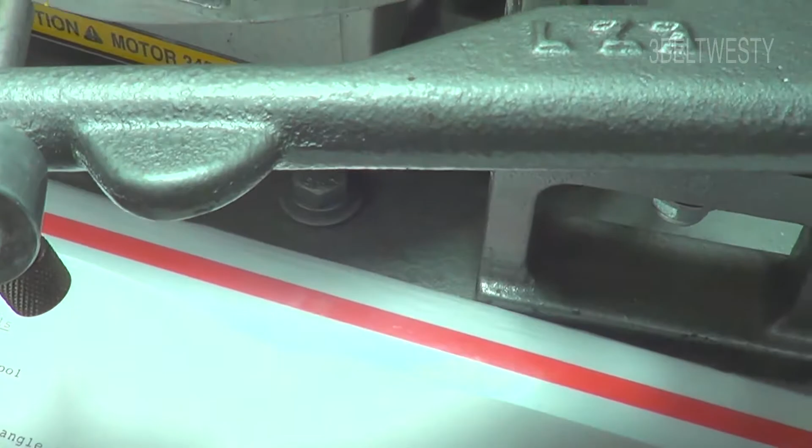On an Easy Sharp machine, the radius of hollow is set by moving the diamond with respect to the tool holder. When this edge is flush to here, it's 5/16.

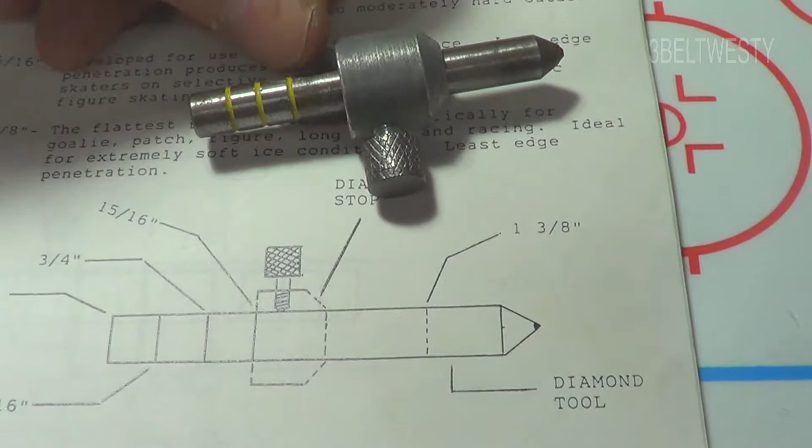When it's to this first mark, it's 9/16. The next one is 3/4. This is 15/16. If you get the nose cone all the way up here, it's 1 3/8.

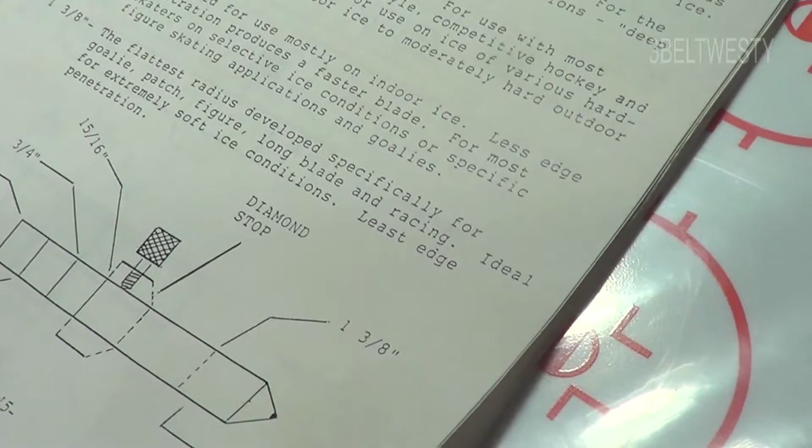And this has got 1/16ths marked off. I went through and did another diagram, a little bit easier to understand, at least for me.

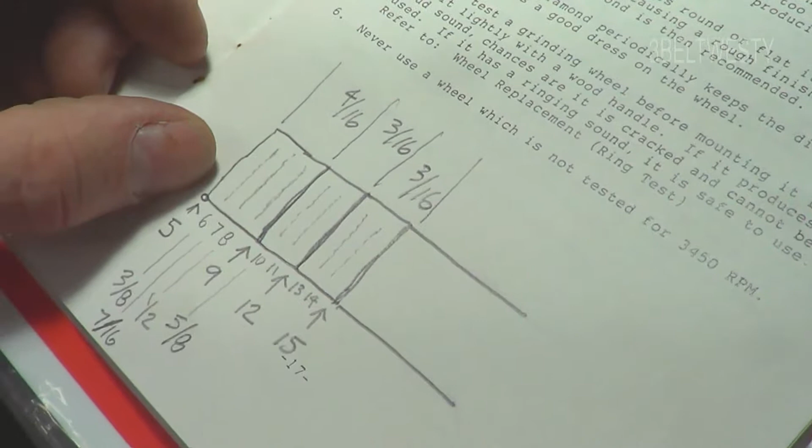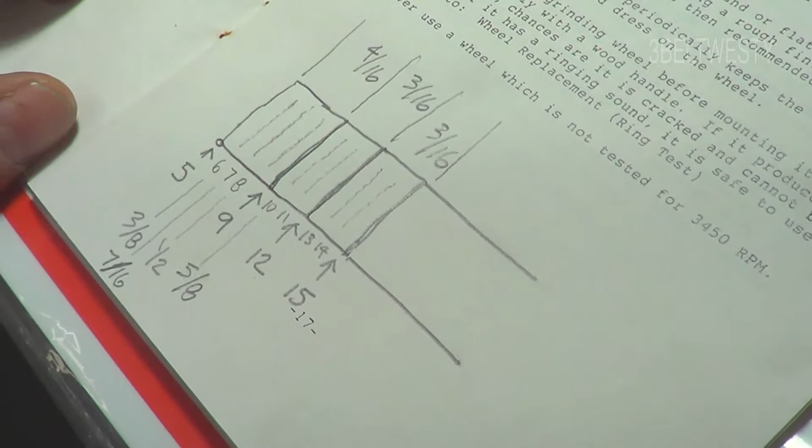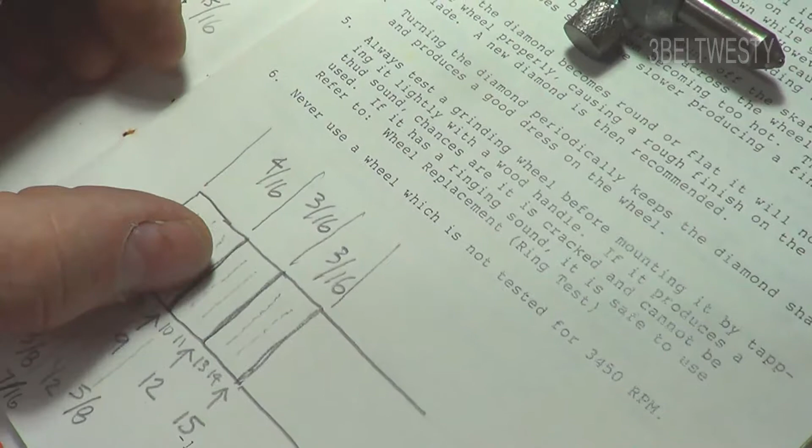It's 5/16 at the edge. There's 9/16, 12/16, and 15/16. So the two bands are 3/16 apart here, and then it's 1/4 inch, or 4/16, up on here.

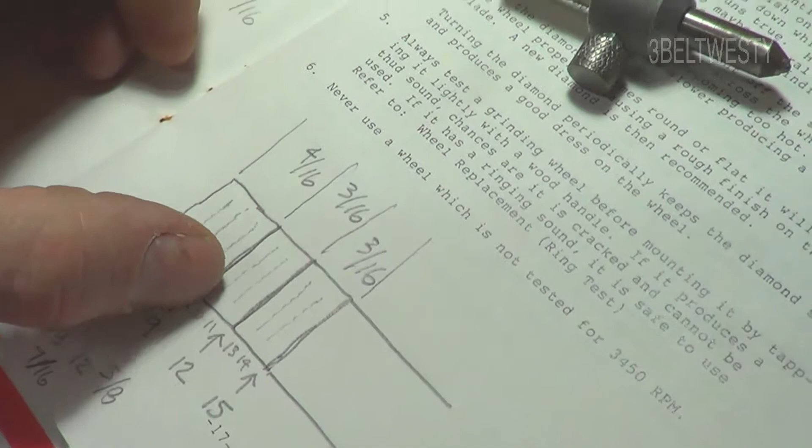I was just using this to kind of figure out, okay, if this is 9/16, there's 5/8. To visualize, you've got two other bands between there.

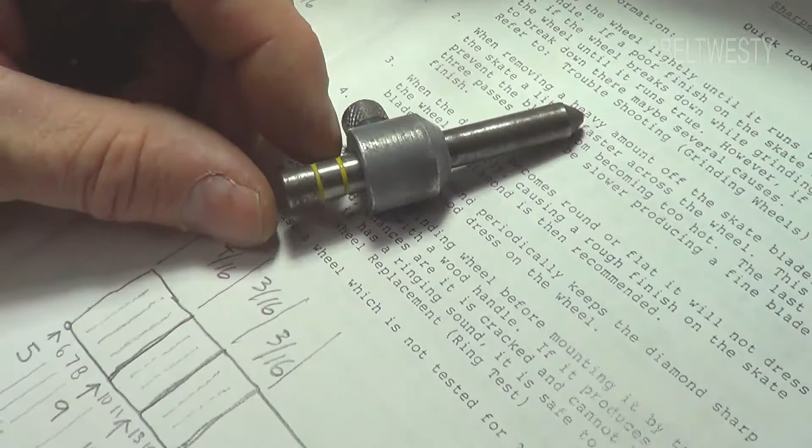So you undo this. If that's flush, like that, that's 5/16. And most of the time, there's a 9/16 right there. If you want to go in to 3/4, if you want to go just like that, that's a 5/8.

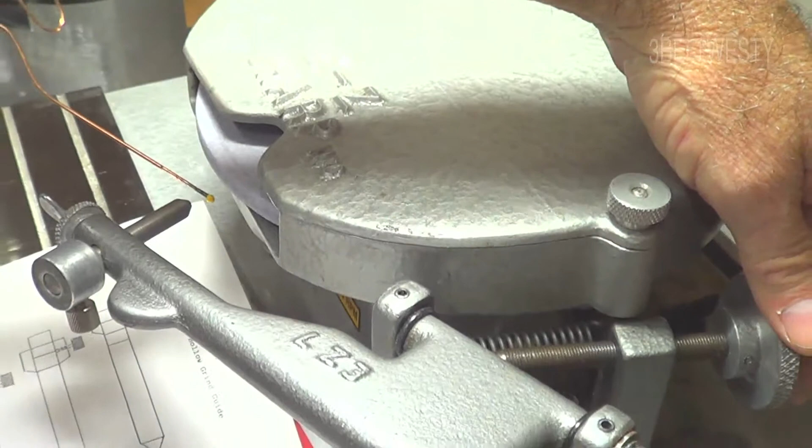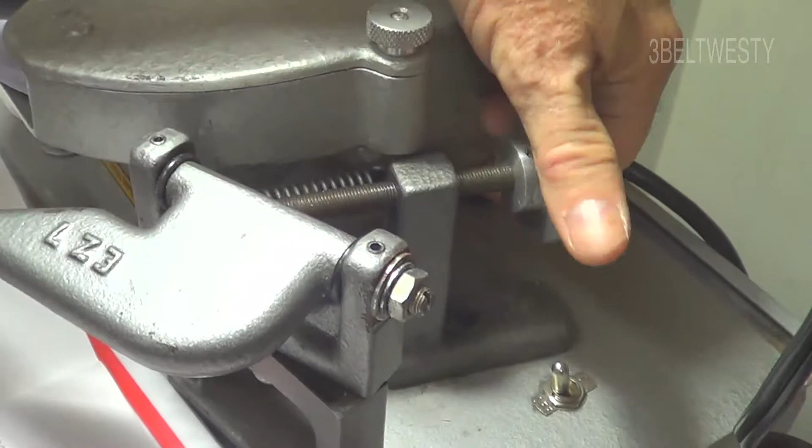Now over here, when you adjust where it is on the machine, this knob brings the tool that's used to cut the radius of hollow. And when you're done, you turn this knob to bring it out of the way. I've got this screwed way out of the way just to illustrate what's going on.

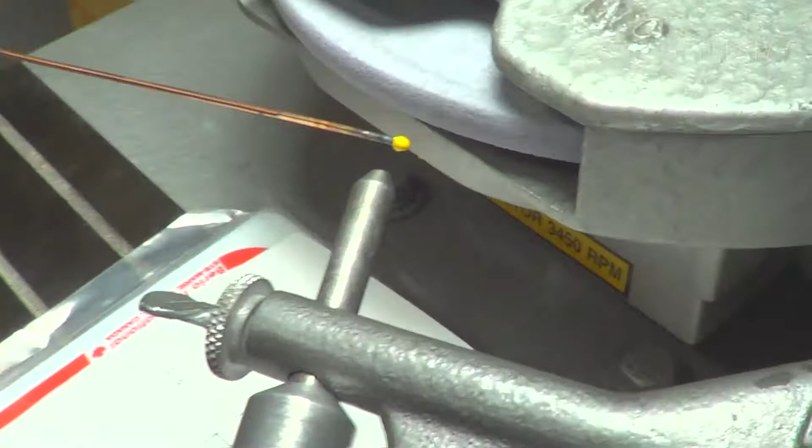I've got this set to 5/16, and then I've got this little dot, a little wire here suspended in space, to show you what's going on.

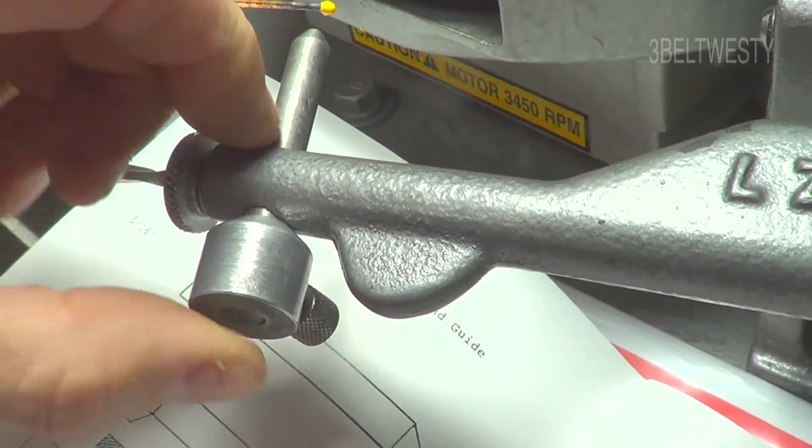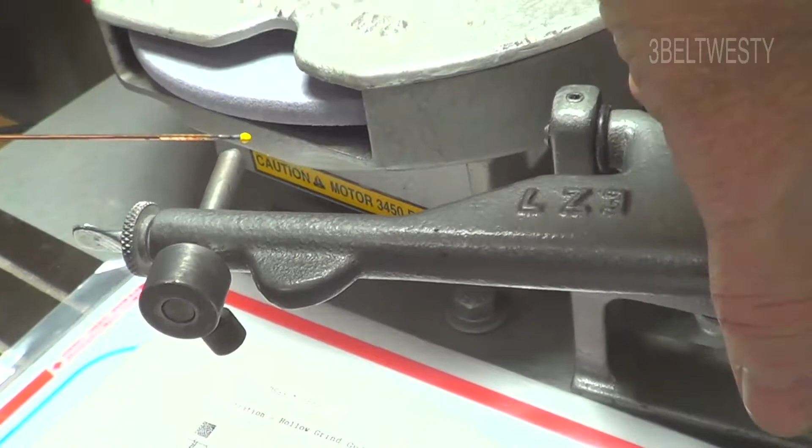So right now, the 5/16 radius of hollow means that from this diamond to the pivot point is 5/16. That's here, the first condition, where it's flush. So that little yellow dot is actually in line between these two pivot points.

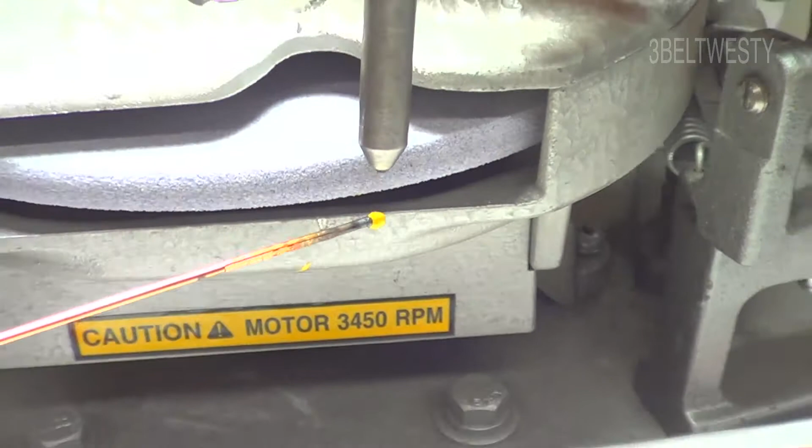So if you swing this around, it's kind of like a little planet that orbits right here. It's 5/16 from the diamond to the yellow dot. There it is, 5/16 from the diamond to the yellow dot.

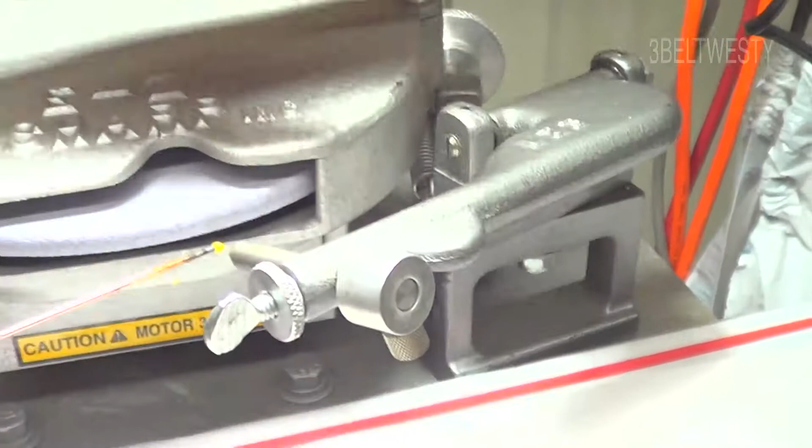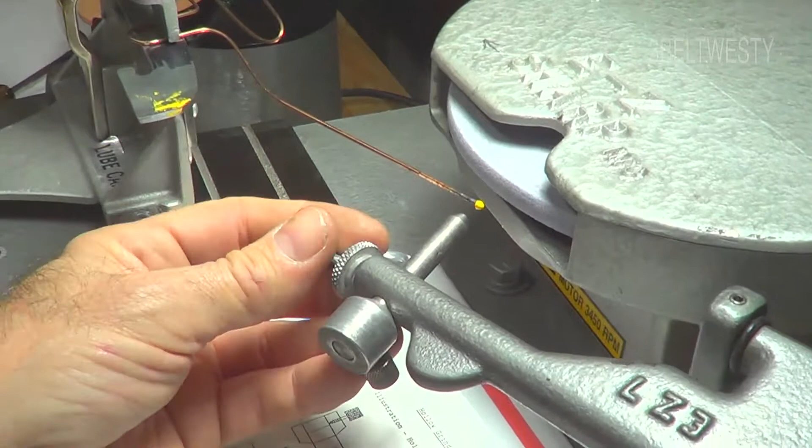So when you traverse this in here to actually cut the stone, you're going back and forth like this to cut the stone. And then when you're moving this out to be in a different position, this is set up right now to be 9/16.

If I pull this out, this is just a spare to put in here like that. Then the distance between the dot and here is 9/16.

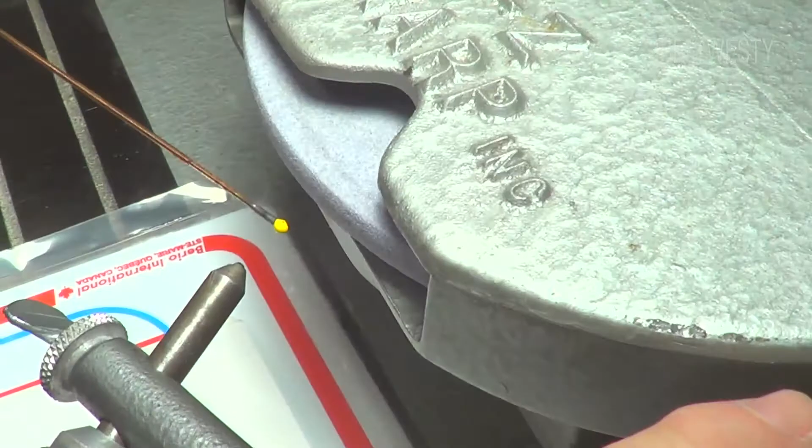You can see the arc.

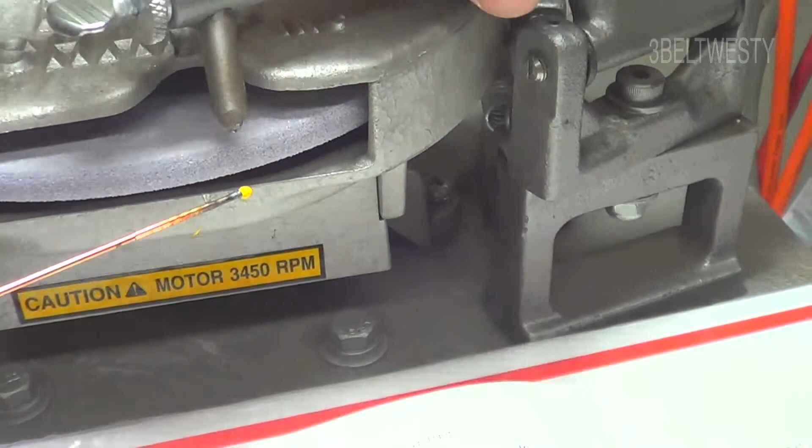Now, this is the Easy Sharp machine. It's made in Minneapolis. It used to be made in Stacy. This is an older model, a yellow model. The new ones are red. They changed the Z height a little bit higher on the newer models, but pretty much they're the same beefy, robust machine.

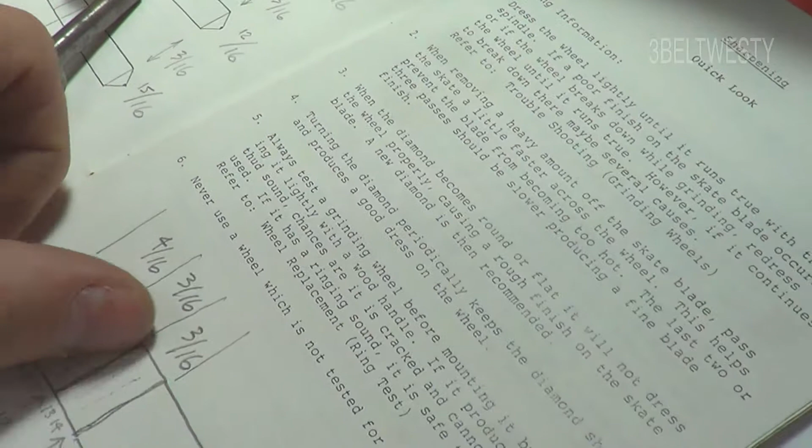Now, if you go here and set this to be 15/16 way out here...

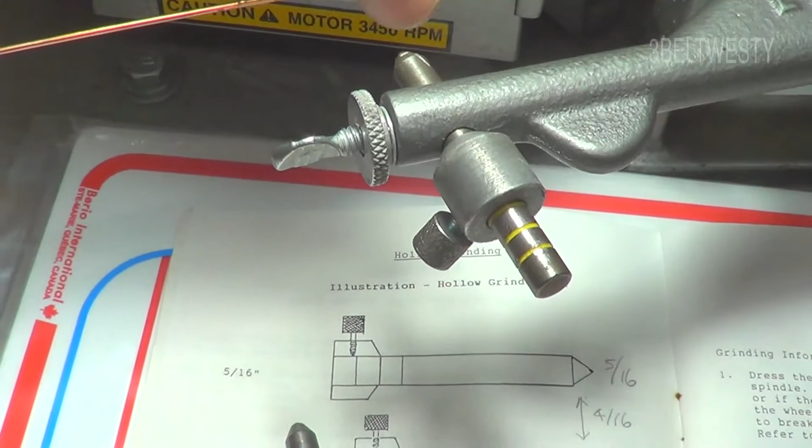When this is in the holder like this, notice I haven't moved this. There it is, from here, that dot to the edge of the diamond is 15/16, and as I traverse this, it's still the same distance from the diamond to here.

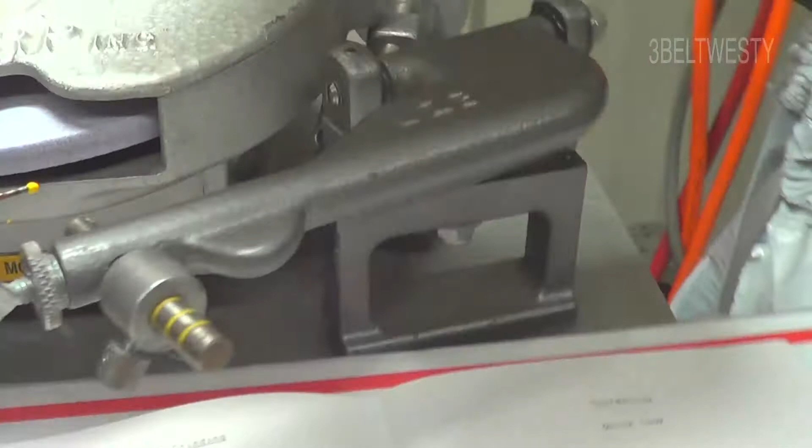So when you adjust this and change the diamond, you've got to be careful you don't crash this into the stone, on any machine. You've got to be very much aware of where this is. So if you use a larger radius of hollow, the diamond's back, and you have to pull this back in here when you actually do the cutting.

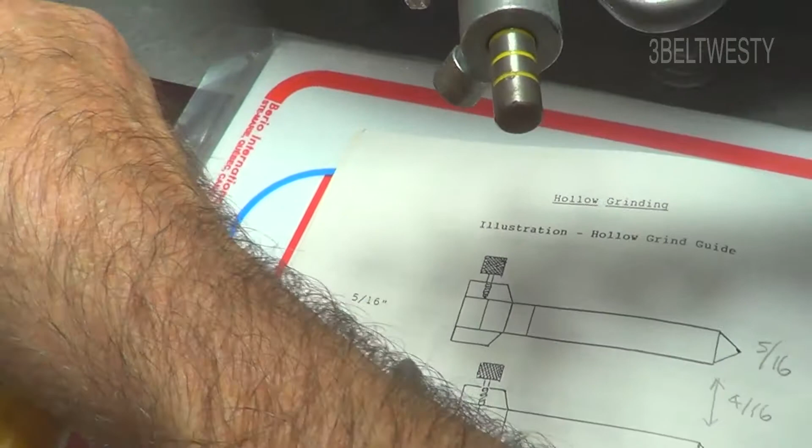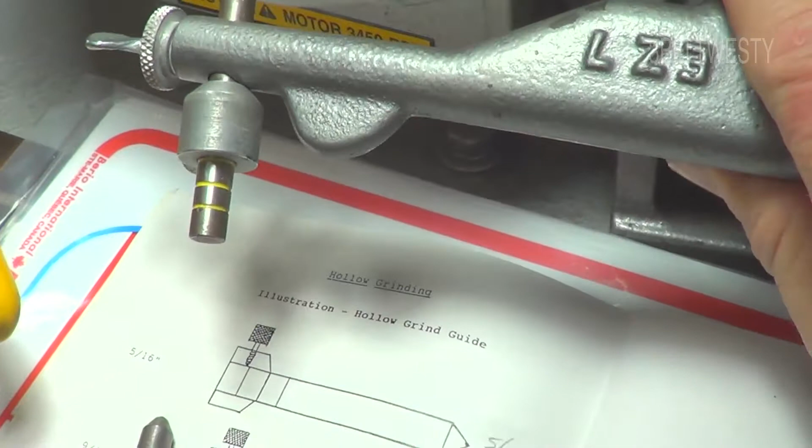If I move the little magic dot out of the way, you bring this up here, you go back and forth like this. And always be careful — I just touched it right there.

So when this is spinning, you just take light cuts. If you go slow, it makes a smooth stone, which is good for finishing. If you go really quick, it makes it rougher, which is good to take off a bunch of rust and junk.

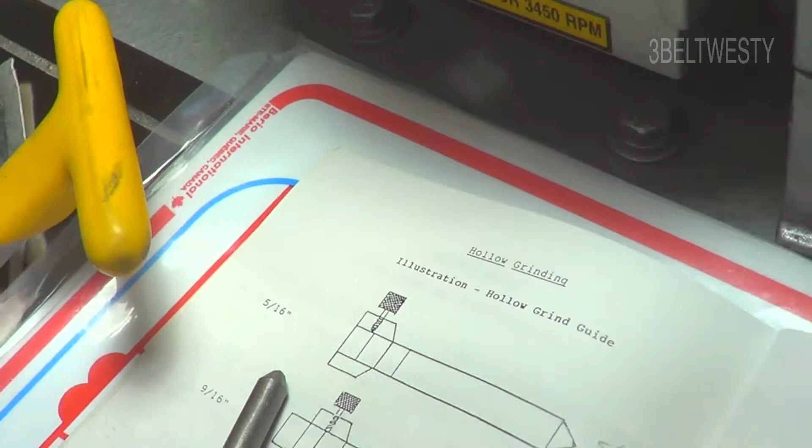And when you're done, you can leave it up here so it's out of the way. What you don't want to do is turn the machine on and then run this out without making sure you don't hit the stone.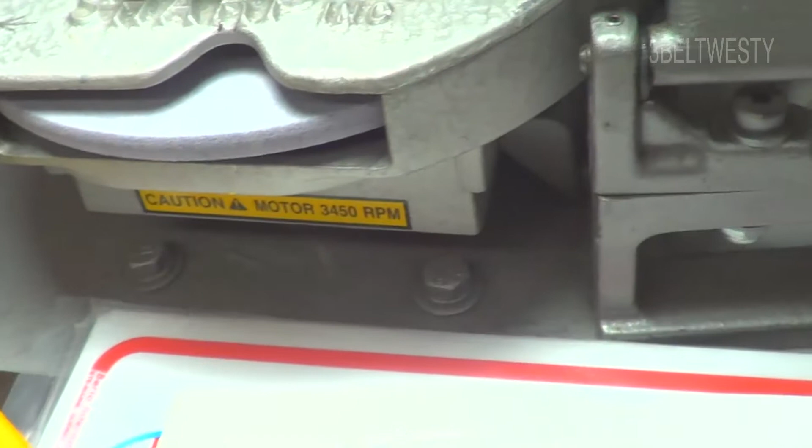Because you'll either shatter the stone — on any machine — or ruin the diamond. So you've got to be very aware of where your diamond is with respect to the wheel.

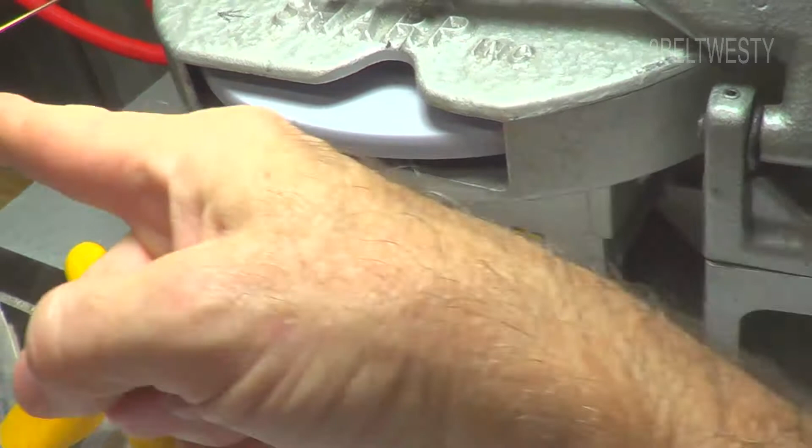There's the machine turned on. This particular machine, the wheel's going clockwise, so the dust actually goes to the left.

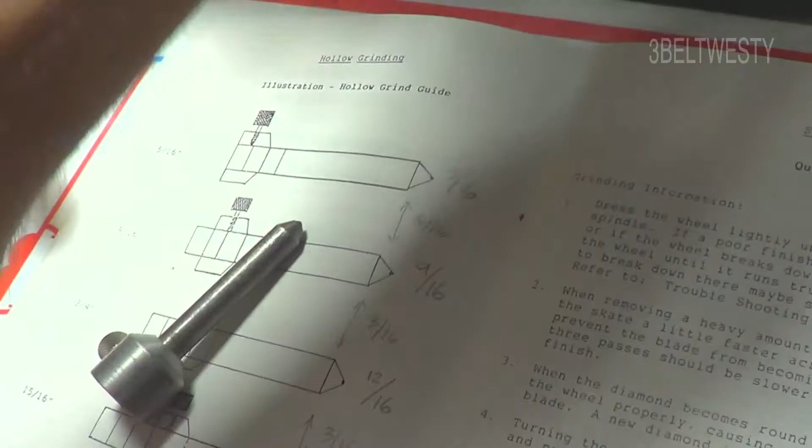And that's it. That's the Easy Sharp machine. It's got the little diamond. And after you cut and use it a bunch of times, you should go ahead and rotate the diamond.

Which means you undo this, rotate this around like this. That minimizes wear by using a different facet on the diamond, and that makes the diamond last longer.

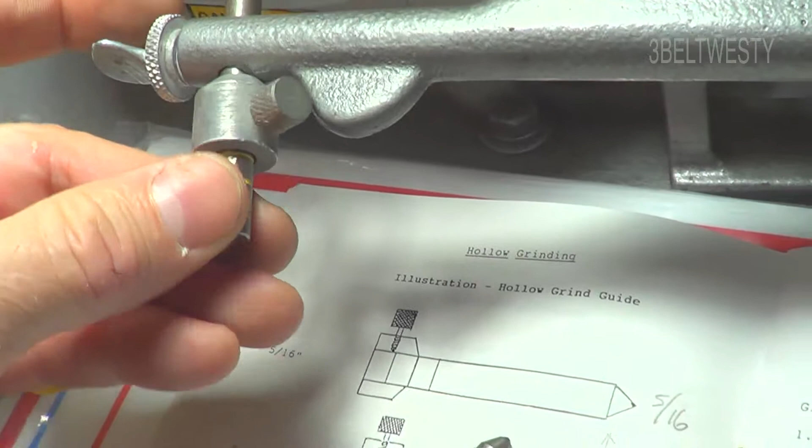You also have to make sure this is loose. If you've got, let's say this is set up to be 9/16, like right there where the yellow band is, I'll turn this way out.

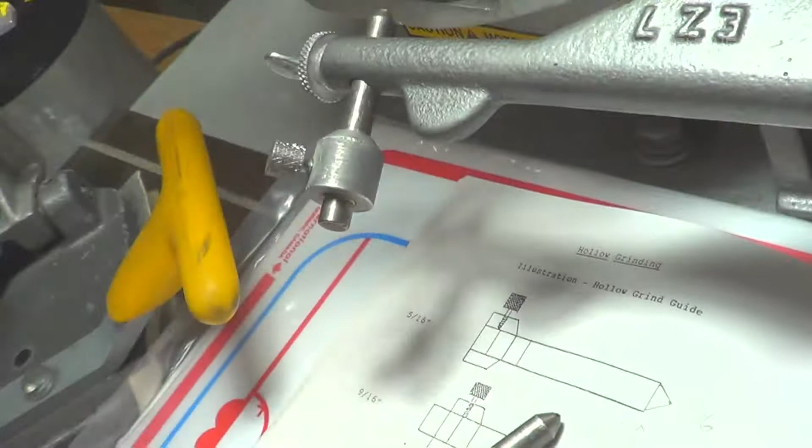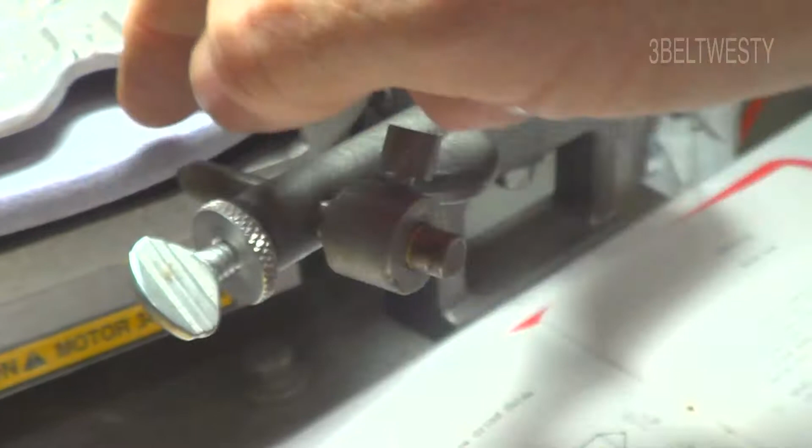If this is loose on this particular machine — these are good, very solid machines — but you don't want to have this just loose as a goose like this, because then you're going to change where the pivot point is going to be shifting around, and you're going to create some chasing your tails.

As far as what edge is higher or lower, so it's better to have this snug to whatever radius of hollow you want.

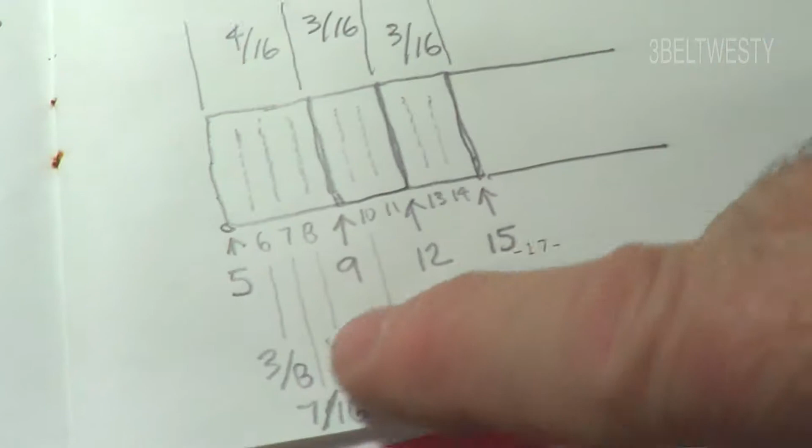Go ahead and put this in and then snug this down. You don't have to go crazy, but you don't want to have this tip flopping around when you're cutting, because the crown will occur at maybe a slightly different part whether you're going up or down.

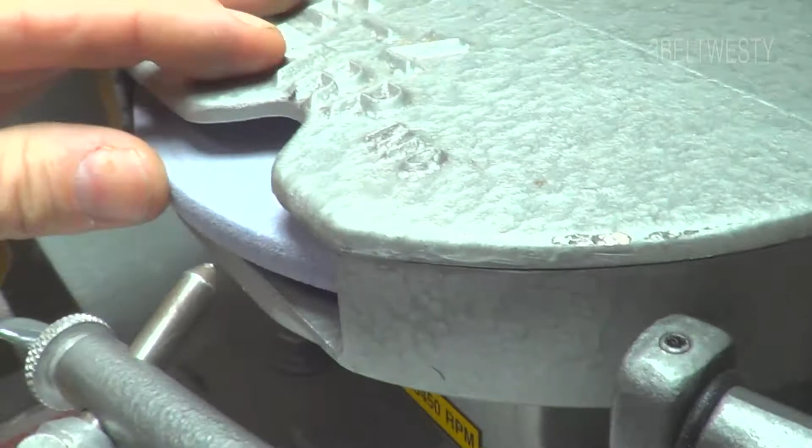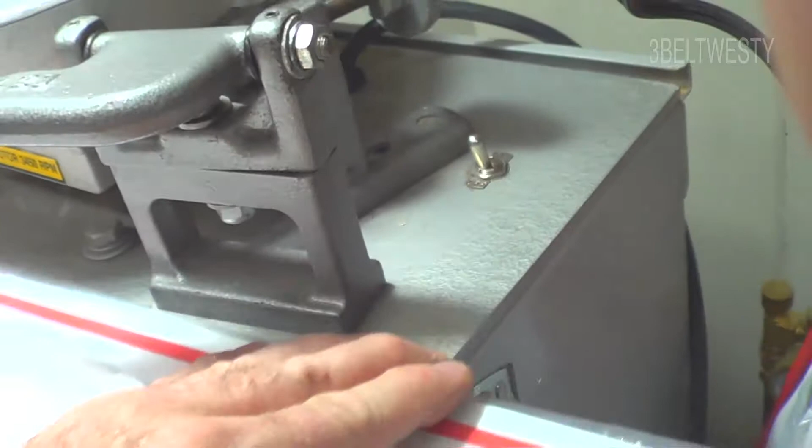And that's kind of an insidious error. Also, where the crown is — the highest point — isn't necessarily at the center of the wheel, because of tolerances in the way this is built in any machine, the way it's set up, the height of the motor, whatever.